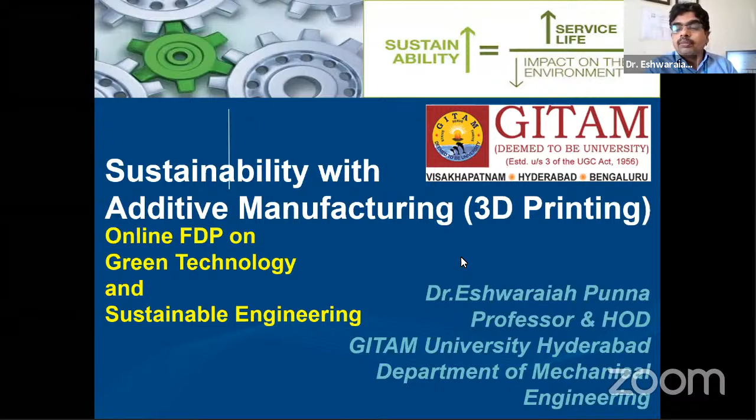So today I am planning to give some highlights on sustainability with additive manufacturing, 3D printing. So this is my plan of presentation. I'll be highlighting differences between subtractive and additive manufacturing, and what is additive manufacturing. I'll discuss a little bit about tools and technologies, processes or methods used in additive manufacturing, materials used in additive manufacturing, applications of additive manufacturing, 3D printing facts and forecasts, and last but not the least, I'm going to touch upon what you mean by sustainability with additive manufacturing.

So before going full-fledged, what is subtractive manufacturing? Whatever conventional manufacturing we do in our conventional machine shops or factories, where from a block of material we remove the material, right? For example, you want to manufacture a sphere. How do you manufacture a sphere? You will take a block of raw material and start removing the material in a curved fashion until you get a sphere shape, right? That is really an old method of doing it.

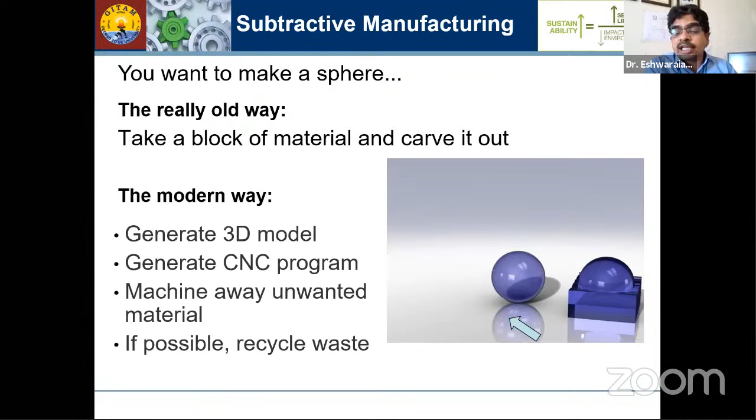But in recent times, not exactly 4 decades, it's about 2 decades, the method is generating a 3D model of the sphere and then generating a CNC code, computer numerical control code, and then machining away unwanted material. If possible, you will recycle the waste. So that is the way we are currently doing subtractive manufacturing, creating a component. As of now it may be a sphere, but any kind of feature to manufacture. Essentially, we are taking a raw material block and removing the material. So that's why the word subtractive.

Now I am going to take you to what is additive manufacturing. In contrast, additive manufacturing is the process of joining materials to make objects from 3D model data, usually layer upon layer, as opposed to subtractive manufacturing methods. In a subtractive manufacturing method, we are removing the material from the initial block. Whereas in additive manufacturing, as the term indicates, we go on adding the material layer upon layer, or layer by layer. So that is the difference.

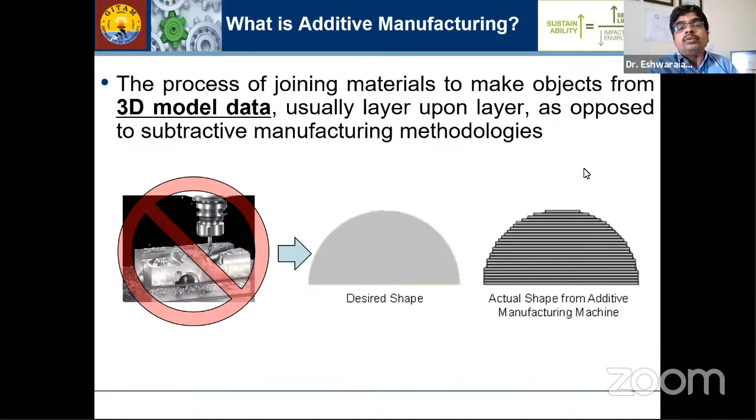If you look at it more closely, what is happening here in additive manufacturing? The creation of solid models usually happens with CAD tools or CAD software. Once you have a CAD model, there is other software available for slicing. We call it slicing software. There, this 3D model will be sliced into small thin slices. Then we will input that slice data to the 3D printer, and that builds layer by layer as shown in the picture. As each layer gets built up, you will get a component.

Many of you may be aware of this technology very well, but here I would just like to touch upon some differences between subtractive and additive manufacturing. This picture indicates that in subtractive manufacturing, in the first line, a raw material block will be taken into the machine, and then you will cut the material. In the process, you will get a 3D object, a physical component, plus some wastage of material. Whatever you cut, whatever you subtract, that material is wastage. Sometimes you will reuse it, but in order to reuse it, you have to process it again.

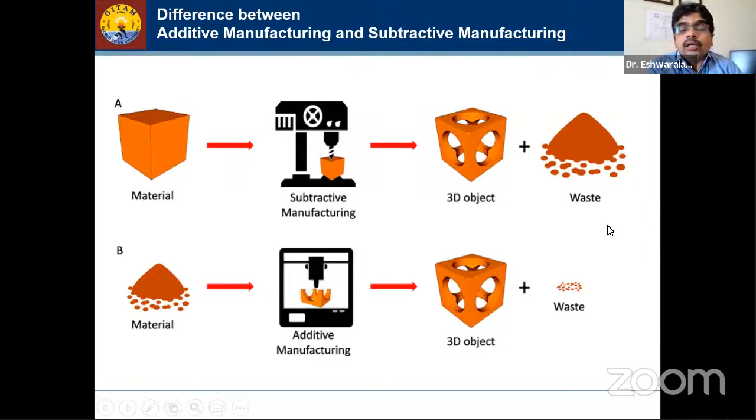Another important thing: in additive manufacturing, we are not using any tools to cut, whereas in subtractive manufacturing, we are using multiple tools to achieve the features. So we need to understand that. I got an interesting video I would like to play.

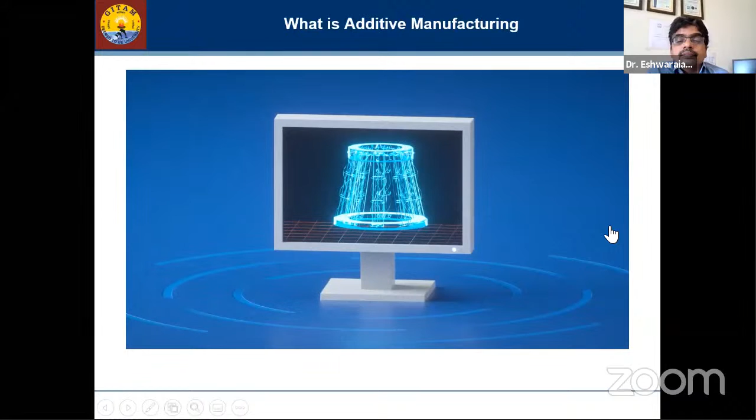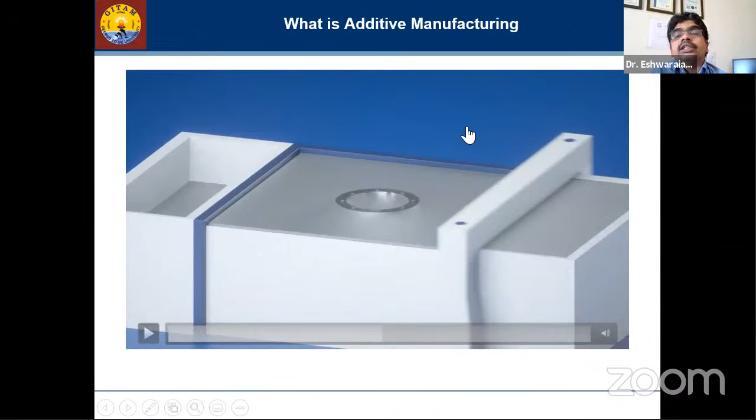Are you able to hear the video? Hello, sir. There is no audio in this video. Only video, no audio, is it? Yes, sir. Is there any way I can add audio? Yes, sir. When you're sharing the screen, there is an option at the bottom, share with computer audio. If you opt for it, the sound will come. One minute. Sorry, I don't know why my screen is not coming. I had to stop sharing. Share with computer sound, I had to click that. Now it is audible. Good. Thank you, sir.

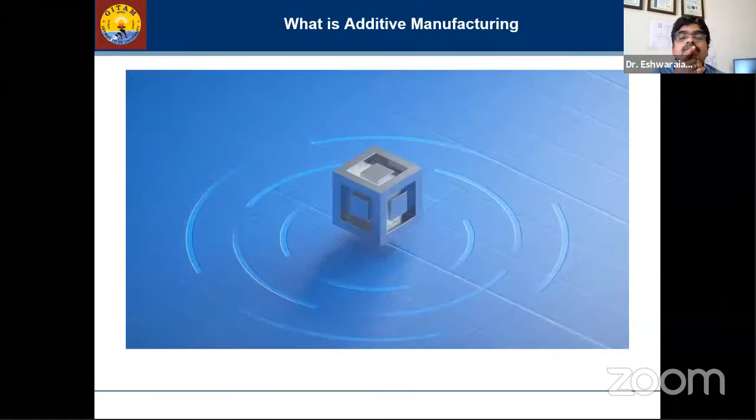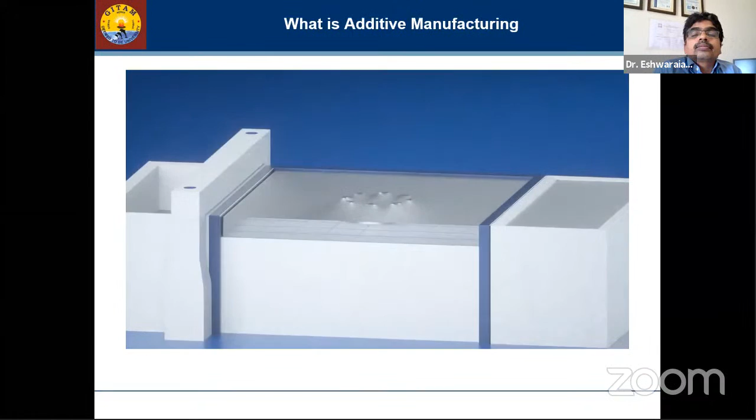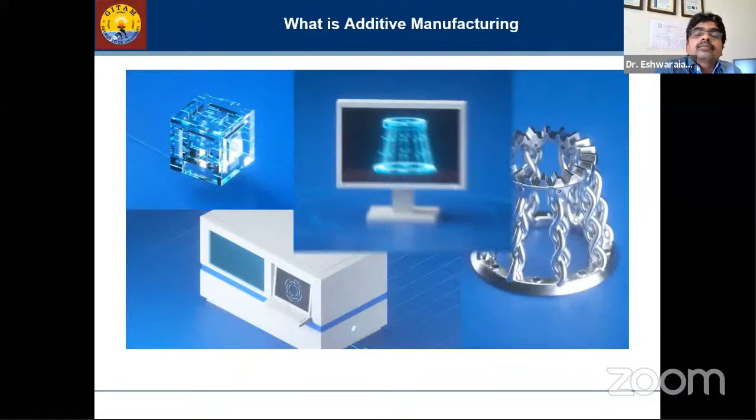So, what is additive manufacturing? Additive manufacturing, also known as 3D printing, is a process that creates a physical object from a digital design. An engineer designs the object using computer-aided design, or CAD software. The 3D design file is then sliced into thin layers and uploaded to an additive manufacturing machine. The manufacturing process begins once an extremely thin layer of metal powder is spread across the platform. A heat source, such as a laser or electron beam, then melts the first layer of the 3D design. The platform is lowered, and another layer of metal powder is spread across the platform. The layering and melting process is repeated until the part is complete. The metallic powder is removed, and a physical object is revealed. Additive manufacturing allows you to produce parts that are lighter, stronger, and more durable than traditionally made parts. Build times are faster. Engineers can add precise features and complex geometries without increasing cost. In fact, additive manufacturing is revolutionizing the way we work.

Okay, so that's about the introduction of additive manufacturing. But in general, there is a confusion between what is 3D printing and additive manufacturing. Actually, 3D printing is additive manufacturing. So, in one more video, I just would like to show you.

3D printing technology is already changing the way we produce objects, from tools and toys to clothing and even body parts. 3D printing is part of a process known as additive manufacturing, where an object is created by adding material layer by layer. Additive manufacturing allows designers to create complex parts for machines, airplanes, and cars at a fraction of the cost and time of standard means like forging, molding, and sculpting. Now, smaller, consumer-friendly 3D printers are bringing additive manufacturing to homes and businesses.

The first step in 3D printing is to create a blueprint of the object you want to print. You can use modeling software like Blender to create your own designs, or you can visit websites like Thingiverse or Shapeways to find objects other users have 3D modeled. Once you have a finished design, it's time to send it to the printer. Some printers, like the MakerBot Replicator 2, have renewable bioplastic spooled in the back of the device, almost like a string. When the printer receives the data, it pulls the material through a tube, melts it, and deposits it to the plate where it instantly cools. As you can see, the 3D object is created through layering, where the printer will add one layer of the object at a time until you have a fully formed structure.

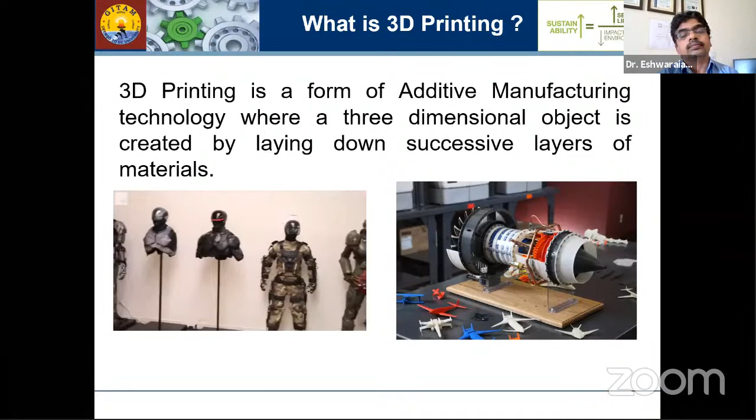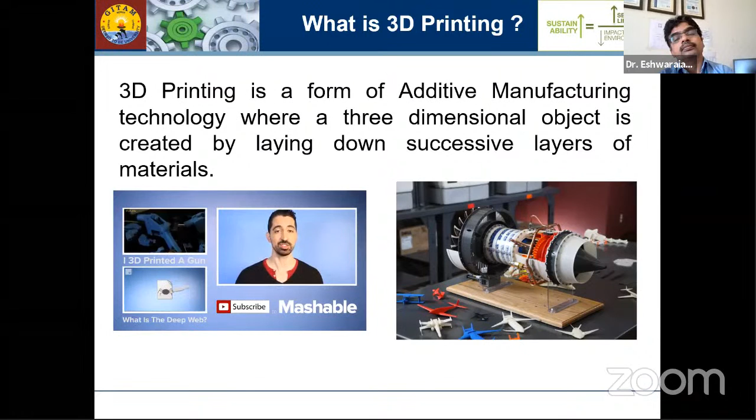The most common material used in 3D printing is plastic, but the use of some other materials allow for the creation of some pretty amazing products beyond simple tools and toys. 3D printing food is becoming very popular, and additive manufacturing has allowed for the creation of some pretty intricate treats. In the medical world, doctors are testing biomaterials for regenerative medicine. By using a patient's cells, doctors could 3D print small body parts like ears and noses. Some surgeons have even tested 3D printed organs for transplants. Recently, giant 3D printers in China printed 10 houses in just one day and at a cost of less than $5,000 per house, proving just how cost and time-efficient 3D printing can be. For more on 3D printing, check out Mashable's latest coverage. And don't forget to watch the 3D printing tech.

Okay, so through these two videos, I would just like to introduce what is additive manufacturing and 3D printing. So essentially, both are the same. So the key thing here is to design your component. So that is up to your imagination. So as a faculty, what we need to understand here is, in order to effectively use this technology, we need to encourage our students to do better modeling.

As of now, what is happening in our institutes, majority of times, according to the syllabus, some portion of engineering graphics we are teaching for mechanical students, the manual drawing, some basic elements, entities like line, curve, planes, etc. And later we are taking them to AutoCAD, how to create these basic entities. In the subsequent years, in the second and third years, we are introducing some kind of modeling of the components, and subsequently some machine design. And then we are asking them to do some kind of projects using these components. So that much only we are able to give.

Okay, so the three major processes are molten polymer deposition, or we call it fused deposition modeling, where the material is in the form of a kind of wire that will be melted, and based on the slicing profile, the material will be poured onto the bed. After completion of one layer, the bed will go down equivalent to one layer thickness, and then the next layer will be formed, poured, and then subsequently, layer by layer, the component will be built.

Whereas the second methodology is SLS, selective laser sintering, where granules of material will be poured, and using a laser, heat will be supplied. Based on the layer profile, the heat is applied onto the powder, and it solidifies and forms a shape.

And photopolymerization is another method, SLA, stereolithography. So here the light source will be applied onto the material to form the shape. So let's look at these three technologies. And apart from this, there are some more methods we will be looking at. In one video, these three technologies are explained very well. Let's look at it.

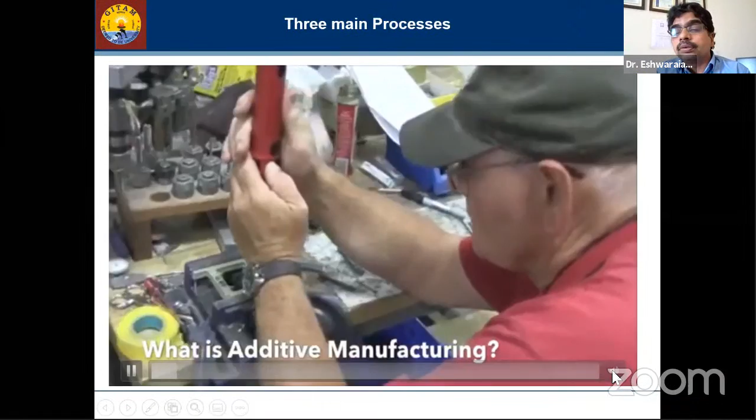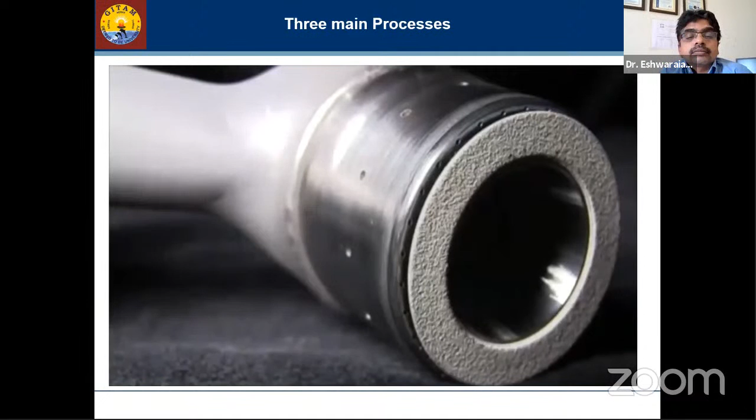Additive manufacturing, otherwise known as 3D printing, could one day be responsible for the third industrial revolution of sorts. The hype of 3D printing started small, but has continued to transform for the last 25 years and has begun rapidly advancing. Just to be clear, additive manufacturing is the manufacturing of tangible 3D items with the use of a printer. This is made possible through the use of computer software and a printer head or a laser to assemble objects from the bottom up in fine layers.

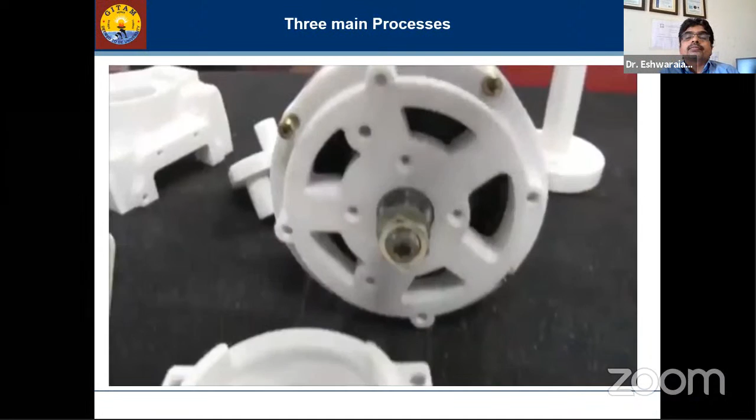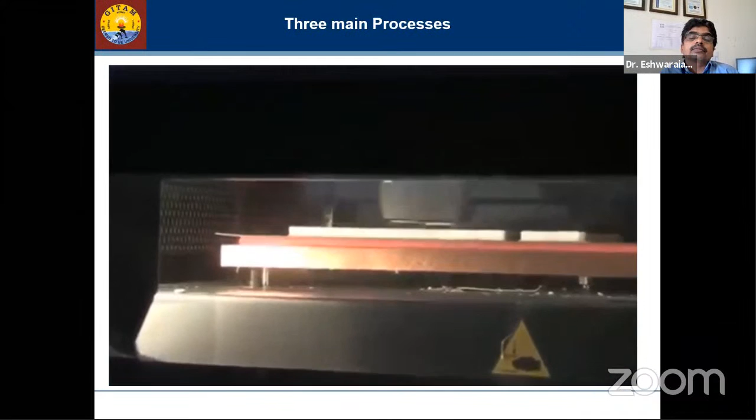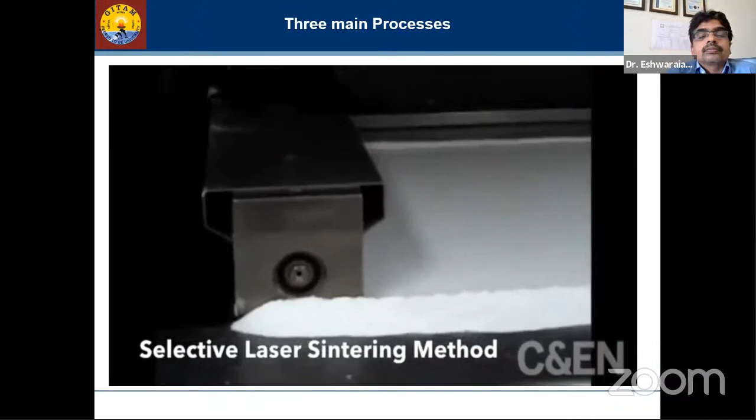Although the technology has been in the works for 25 years, it has been a slow process of development. However, there are now a few 3D printers available on the market at a very reasonable price. There are three types of additive manufacturing methods, which include selective laser sintering, fused deposition modeling, and stereolithography. Created at the University of Texas, selective laser sintering is a process using white nylon powder called polymer to create 3D objects. The polymer is laid on a 3D machine and then rolled down to create a fine layer.

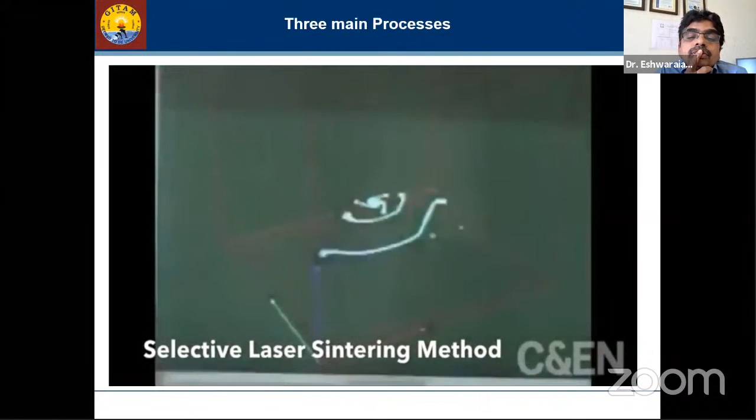The engineer then uses CAD to create an object which is only limited to the imagination and then processes this through the machine. The SLS method uses a laser to scan the surface of the powder. It fuses the polymer together to create a .007-inch layer. This process is repeated over 1,000 times to create an object. Once this is complete, the machine ejects the object for the engineer to brush off the excess powder using cleaning tools similar to those used in dentistry for the final process.

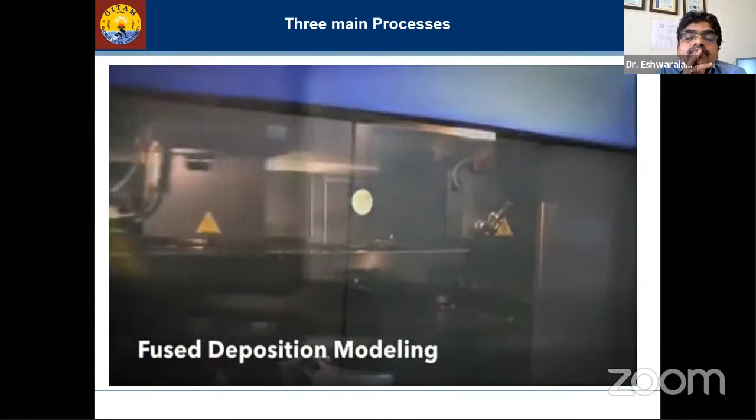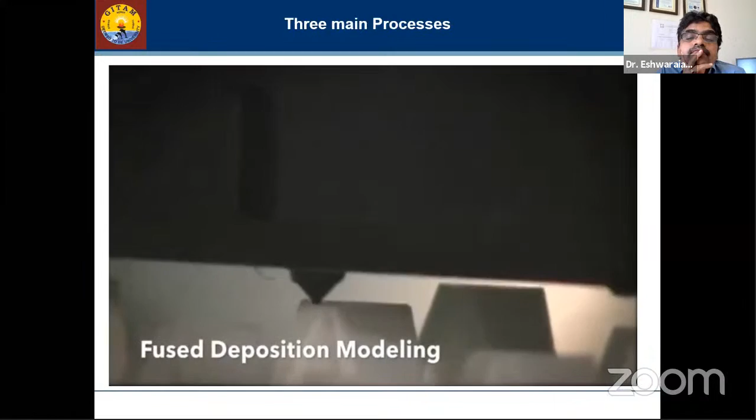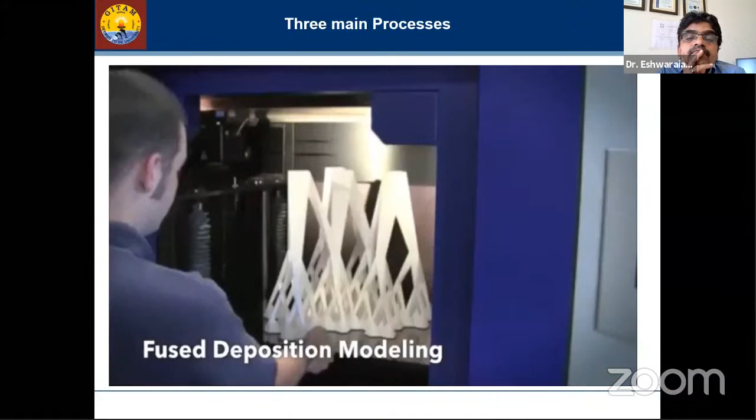Fused deposition modeling is the process of additive manufacturing where the 3D printer sprays a thin layer at a time over and over to eventually create an item. The process requires little human involvement. The engineer uses patented software called Stratasys fused deposition modeling technology to design the object and then either ABS, polycarbonate, or polyphenylsulfone to create strong, durable parts. Once the engineer has made the model on the software, the machine takes over and sprays the design. Once the process is complete, the part is then submerged into a water-based solution where any supporting structures are dissolved. The final product then has a smooth finish with fine details.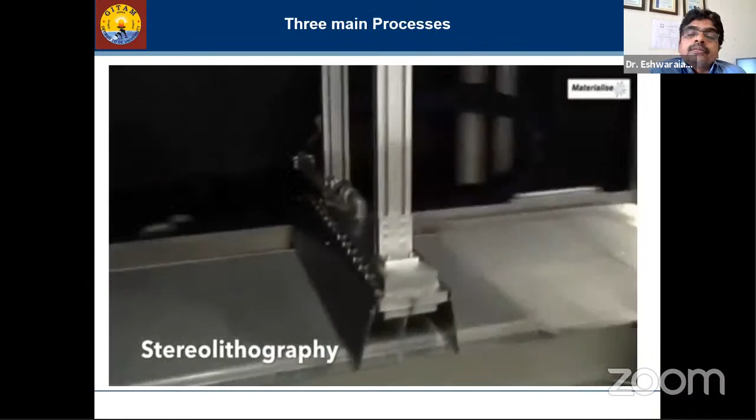Stereolithography is the combination of photochemistry, laser, and software technology used together to create an object from a gel. The CAD data is designed and then sliced into very thin cross-sections. A beam of ultraviolet light is focused on the surface of a liquid photopolymer tracing the design. The product turns the liquid layer into a solid plastic. Once a single layer is completed, it then lowers the SLA machine slowly until the object is complete. This continues until the product is completed, where it goes into an ultraviolet oven to cure the part. This requires little supervision while working around the clock.

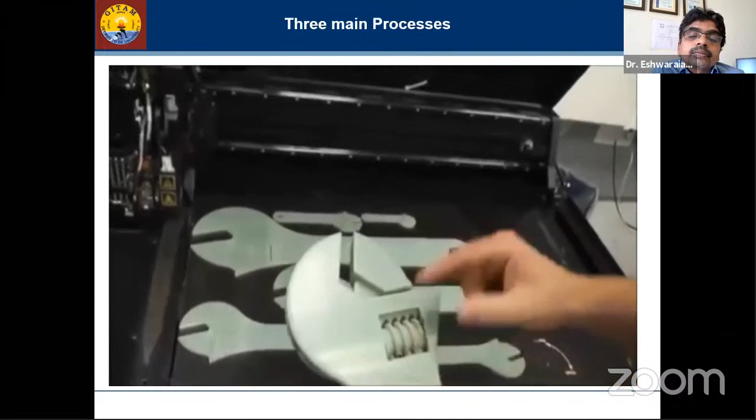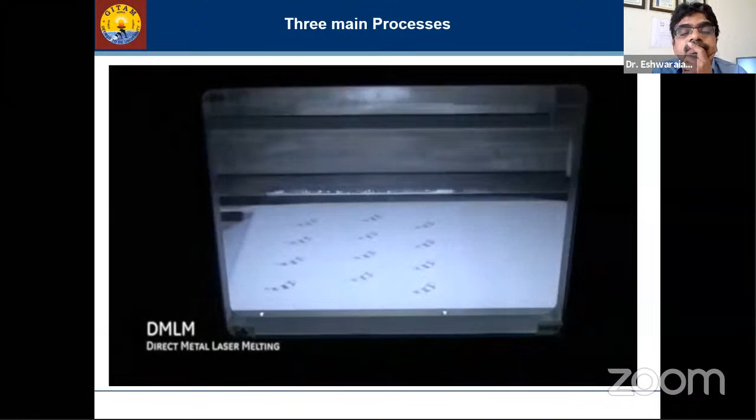Additive manufacturing has cast a new light on the way items are made in today's world. With our technology, there is no limit to what we can create with the use of computer-aided designs and 3D printers. It is inevitable for everyone to own a personal 3D printer in the comfort of their own home in the near future. The three processes of printing, selective laser sintering, fused deposition modeling, and stereolithography, are in the infancy stage and cannot be totally relied on just yet. The more that our technology advances, we become more capable of producing new and innovative products to help make the world a better place. As Eleanor Roosevelt once said, "The future is literally in our hands to mold as we like, but we cannot wait until tomorrow. Tomorrow is now."

Okay, so those are the three methods for additive manufacturing. And apart from that, material jetting is another method. It is an additive manufacturing process in which droplets of build material are selectively deposited, sometimes through a single nozzle or multiple nozzles. So with multiple nozzles, you can also get a multiple-color component.

So the nozzle will move in all three directions, and ultraviolet light will be applied as the curing source. So again, here also the material will be exposed layer by layer.

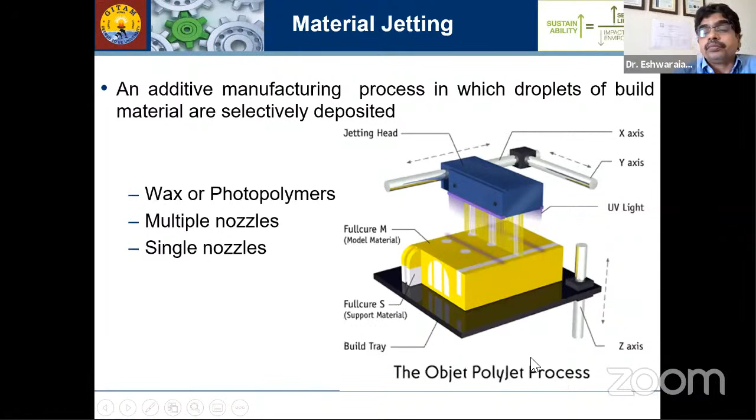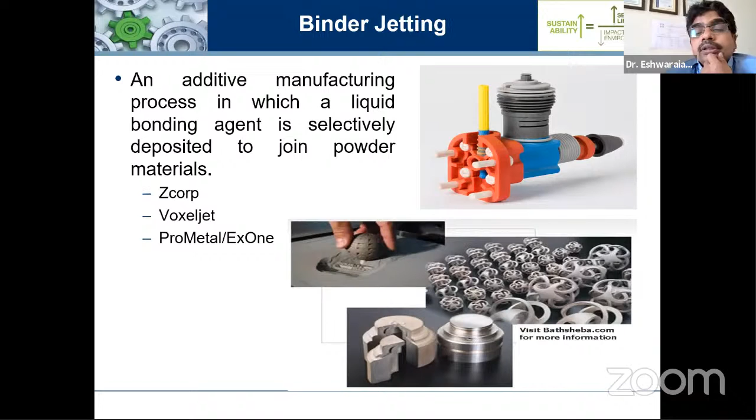So another method in additive manufacturing is binder jetting, a process in which a liquid bonding agent is selectively deposited to join powder materials. Okay, so some minute parts, like hearing aids, such kind of small components, using powder materials with a binding material, we can create the parts.

And material extrusion is another method. It is also used in FDM technologies, an additive manufacturing process in which material is selectively dispensed through a nozzle or orifice. For example, Stratasys FDM machines use this extrusion method. The wire will be fed, and that wire will be exposed to the heat source, and the wire will get liquefied and it will pour onto the profile.

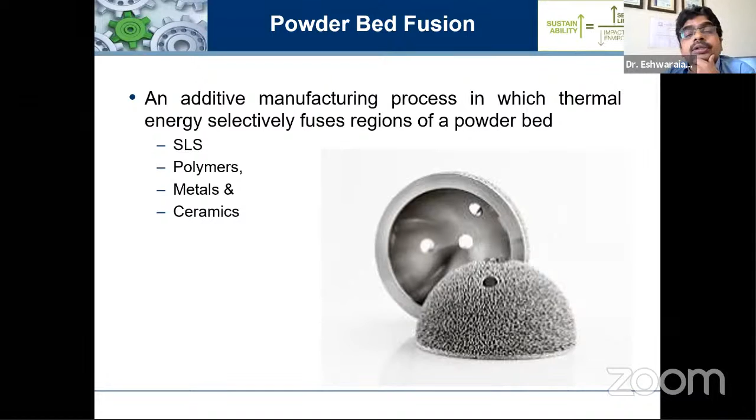So the powder bed fusion method selectively fuses regions of the powder. This method is used in SLS, selective laser sintering, with polymers, metals and ceramics. You can use these materials in SLS. Okay. And another method, we just now have seen stereolithography and selective laser sintering, where the heat source is laser. The polymers get exposed to laser to form the required profile, selectively cured by light activated polymerization. So stereolithography is one technique used in photopolymerization.

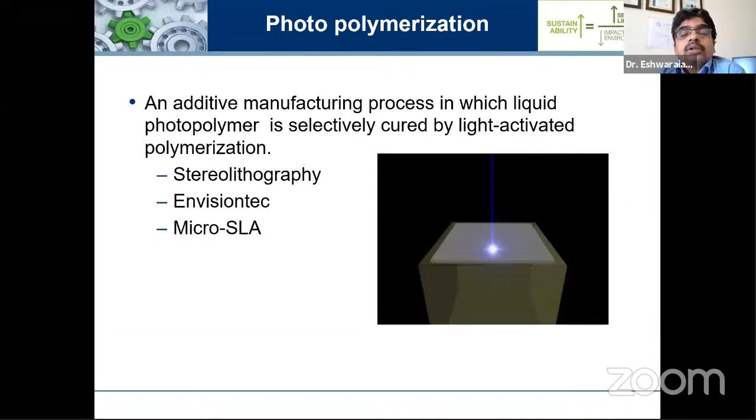Okay, so looking at all these methods, essentially what is happening here is you need to model a component and convert that component into a slicing model that gives the STL stereolithographic file. Basically it internally converts into triangulated objects, and once it is converted into slices, it will be like G code, the G codes of a CNC machine. After converting the 3D model into slices, each slice is like geometrical locations. The machine has to understand the profile using geometrical locations, and those will be converted into G codes.

And in turn in 3D printing, the x-axis, y-axis, z-axis movement happens as it happens in the CNC machine, and there is a synchronization built between the movement of the 3 axes and pouring the material through the nozzle, or through the sintering process, or through the light source process. So essentially it will be a G code again.

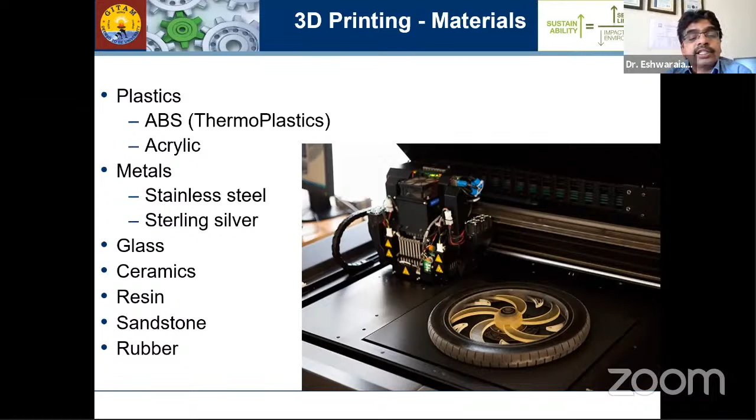So some of the materials used in 3D printing are ABS, thermoplastics, acrylic materials, metals like stainless steel, silver, glass materials, ceramics, resins, sandstone, rubber, all these types of materials you can print. So if you look at technology versus what materials you can print, the extrusion process, FDM, fused deposition modeling, also called fused filament fabrication, uses thermoplastics, eutectic metals, edible materials, rubbers, modeling clay, metal clay.

Whereas light polymerized technologies like stereolithography essentially use photopolymers. And powder based technologies are like EBM, SLM, selective laser melting, selective laser sintering, and direct metal laser sintering. All these technologies use multiple materials, like SLA, photopolymers again.

EBM, almost any metal alloy, including titanium alloys, you can use there. And SLM, titanium alloys, cobalt chromium, stainless steel, aluminum, any material you can print. And selective heat sintering is another method where thermoplastic powders will be used. Selective laser sintering, as I mentioned earlier, thermoplastics, metal powders, ceramic powders can be used.

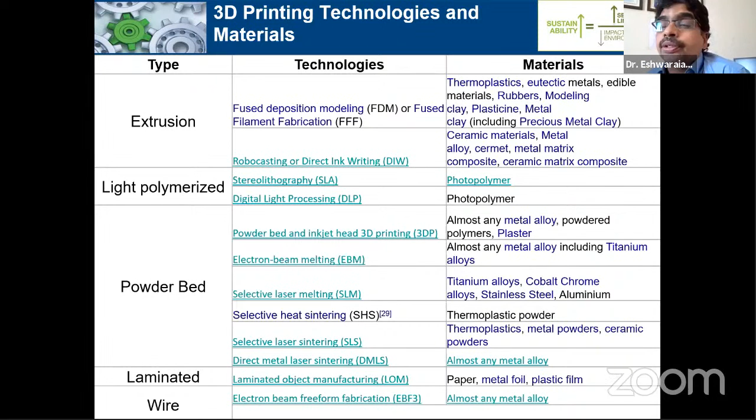Wire technology, electron beam freeform fabrication, is another technology. Almost any metal alloy you can use. So this will give some brief idea what kind of range of materials you can use in these technologies. Okay. So let's look at various applications. I know many of you are already aware of the applications, but however, I would like to highlight some of the applications.

So this technology has applications in medical, dental, extensively they are using, the architectural domain, engineering, you name any field like automobile, aerospace engineering, any engineering field, you have applications of this technology. Chemistry, and you have applications in archaeology, sculptures, art, all these domains you have various applications. Let's look at how they are using this technology in these areas.

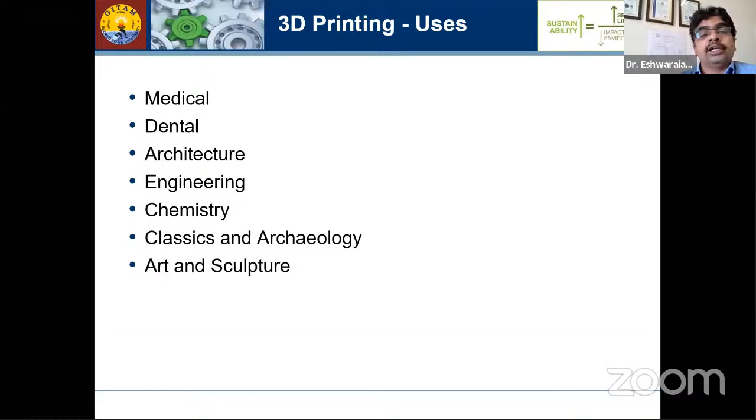So more complex geometries can be achieved through this, because if you go for conventional manufacturing, if you want to get the internal features or structures, then you might need to go for multiple axis CNC machines, or if a component is not able to get a required curve, then instead of a 2-axis machine, 2.5 axis, you have to go sometimes 3 axis, sometimes for more turbine related or more complex structures, you might need to go to 4 axis or 5 axis or

6 axis. So with the number of axes involved in the machining, the cost of that machine will increase exponentially. So very rarely we use 6-axis machines for the components, unless in an aerospace domain or defense related projects. In normal consumer shops, we will not go for 6-axis or 5-axis machines, since those are very expensive. So this technology is helping us. No need of those number of axes to produce the component.

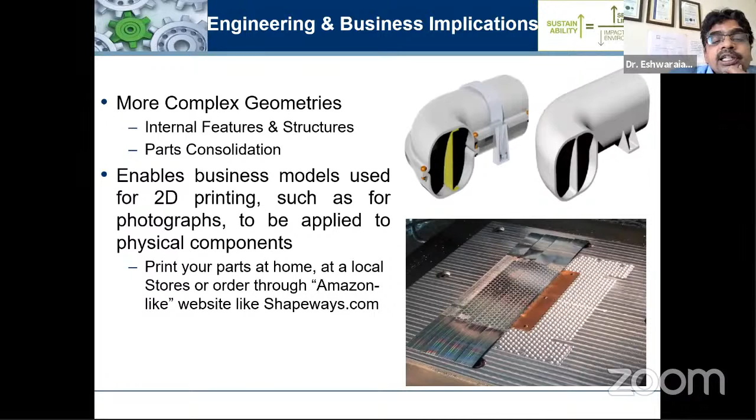Any amount of complexity of geometry, any amount of internal features can be achieved, and it enables business models used for 2D printing, such as for photographs, to be applied to physical components. Print your parts at home, at a local store, or order through an Amazon-like website like shapeways.com. So the business scenario is changing.

Okay, so essentially you can order some of the components, or you can get some components from sites like shapeways.com, or some other sites where you can get pre-modeled components, and then you can use those components and print them. So user changeable web content plus a network of additive manufacturing producers is already enabling new entrepreneurial opportunities.

So all these companies like shapeways.com, Freedom of Creation, FigurePrints, these are some of the companies evolved after these concepts. So they essentially get the components from the net, and they will print it and sell it over the net. Okay, so these technologies are giving an opportunity to new entrepreneurs.

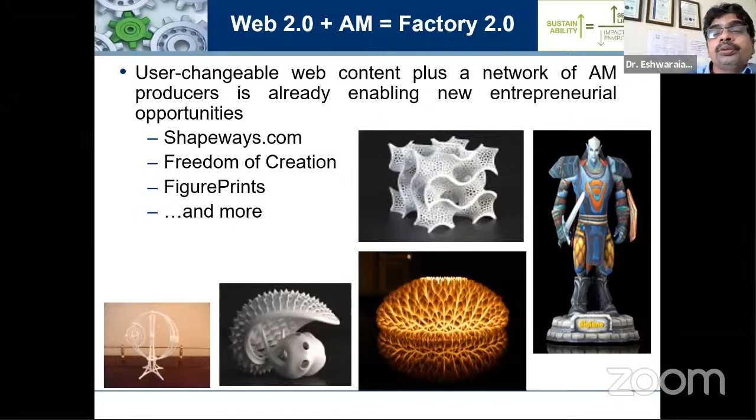Okay. So, impact on logistics. This technology has a lot of impact on logistics because design anywhere, manufacture anywhere is now possible. Earlier in the conventional manufacturing method, you have to procure the raw material and then you will be manufacturing and then keeping it as work in progress or some inventory before giving to the customer. Maintaining the inventory itself is a very big task and a lot of investment is involved.

And if it is expensive components, keeping multiple components for a long time is economically very difficult for the organizations to maintain. So all those things have been addressed by this technology. Here you can design whatever you want and print anywhere. You can design anywhere and simply transfer the design, and somebody will print it and deliver to you. Or you can design at your own place and print at your place. Manufacture at the point of need rather than at the lowest labor location.

Okay, so that is the change in the logistics. That means you don't need to transport the raw material from one place to other. So that will reduce the transportation in a huge way, changing just-in-time delivery to manufacture on location just in time. So you can just order the things, and within no time you will be getting the component, or you yourself can print. So that way it has a lot of impact on the logistics. Now it is matured in some of the Western countries, but in India it is picking up at a very high pace.

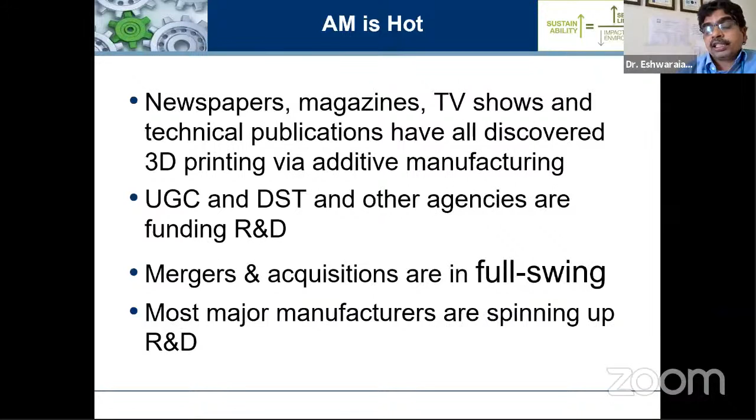The funding agencies like UGC and DST are very much inclined towards giving a lot of funding for R&D related to additive manufacturing or 3D printing. Newspapers, magazines, TV shows, everybody is talking about 3D printing and additive manufacturing. A lot of business acquisitions and mergers are happening in this area. Most major manufacturers are spinning up R&D. So they are looking at how to make some percentage of their conventional components using 3D printing. Essentially, a lot of buzz around the market.

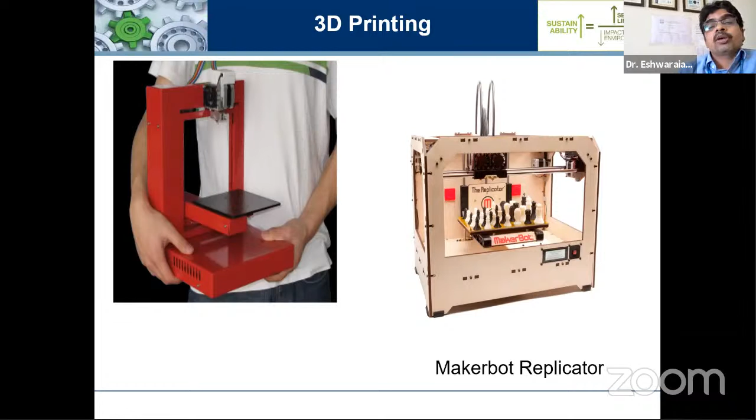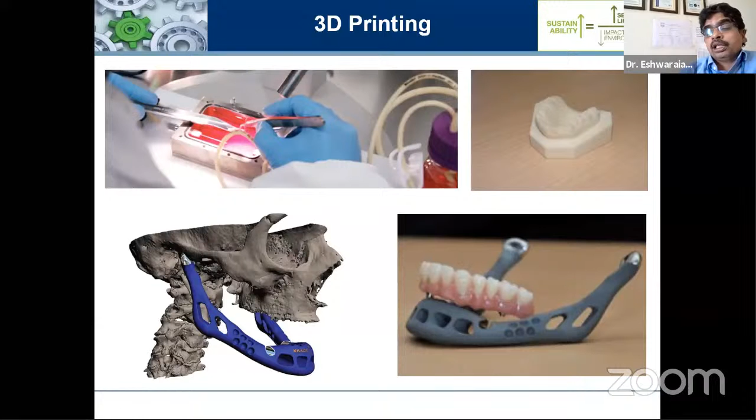Okay, let's just look at some of the players in this market. MakerBot is one of the promising ones. And as you know, Stratasys is one of the pioneers in this 3D printing area. They sell printers as well as printing materials. Okay, so you can build many types of toys, functional toys. And as I mentioned, there are a lot of applications in dental implants or human implants in the orthopedic area or dental area.

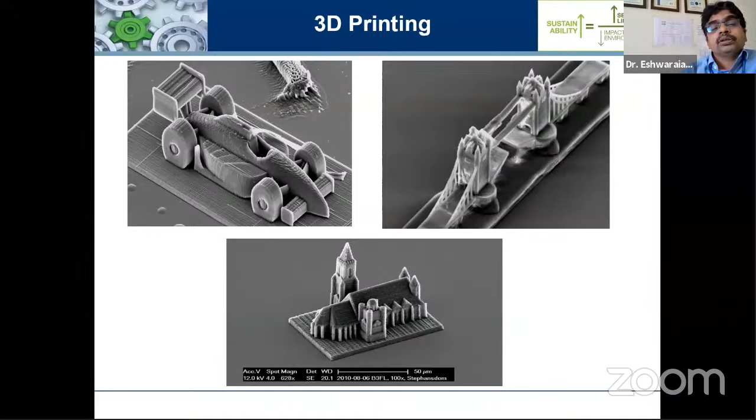And this is toys manufacturing, and in the architectural area also there is a lot of scope to apply. So if you look at some of these images, there are printers to print the sculptures which you see on the roads most of the time in the Western countries. Such kind of sculptures you can see. Those can be built within no time using these printers. Otherwise, getting those features with conventional manufacturing is very difficult.

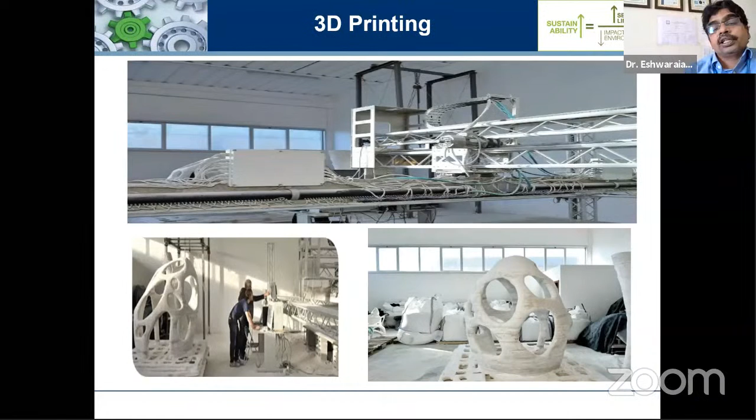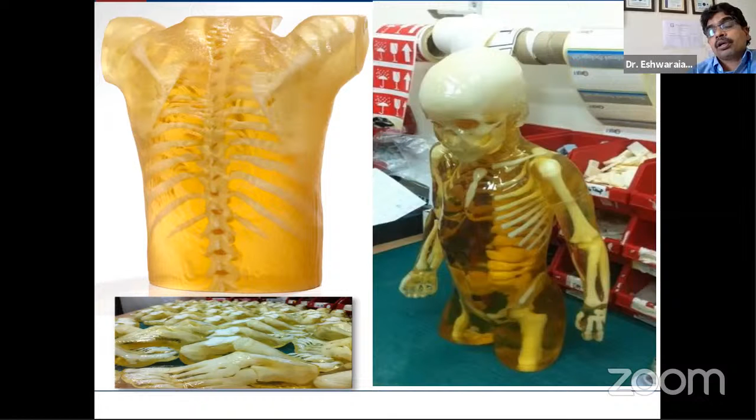Okay, so you can print your face, and some software like 3ds Max, Blender, Google SketchUp, some of these tools you can use to generate an STL file. See some of the medical applications, dental implants, and not only dental, orthopedic implants also you can print, and then the doctors are doing trial and error for research purposes. These implants are very much used in the medical field.

Okay, so if you look at this beak, to generate this beak through a conventional manufacturing process, definitely you need a 4 to 5 axis or 6 axis machine to accomplish these kinds of structures. But with additive manufacturing, with small support materials and a small setup, you can accomplish this. Whereas in conventional manufacturing, you need a lot of jigs and fixtures to hold these kinds of complex shapes. Of course, you have casting and other technologies, but to get a smooth surface finish, you need a lot of other processes.

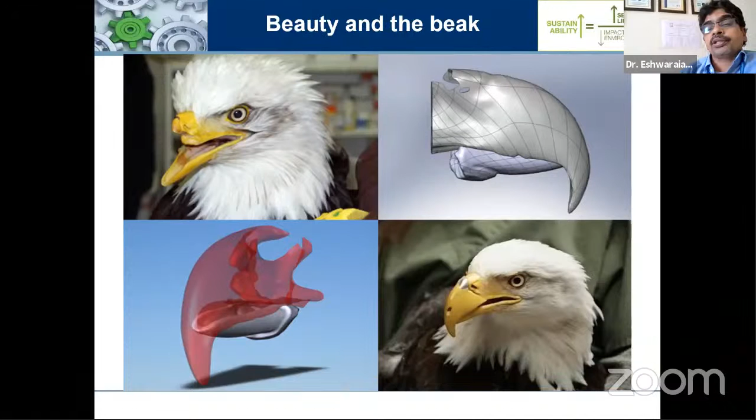Coming to general applications, there is a lot of interesting stuff you can do with additive manufacturing. See what is happening here. After the mother's scanning in the 5th or 6th month, you can get that scan image, and then you can convert that scanned image into a model using reverse engineering, and then subsequently you can slice it and print, and you can see your baby before birth. That is the kind of scope this has.

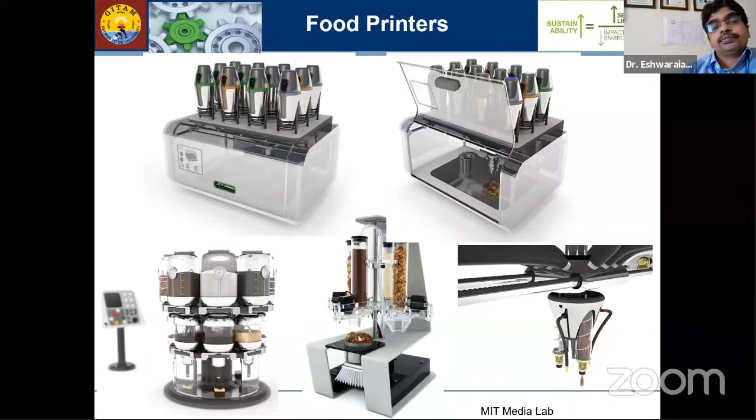Okay, and then one of the videos explains that 3D printing food is becoming normal. Chocolates, cookies, anything you can customize to your requirement or your taste, and you can print whenever you want. Not only food, you have home applications like toothpaste, toothbrush. You can customize your toothbrush according to your tooth profile, so you can change the hardness of your toothbrush, the bristles, the color, you can customize that, and you can print at your home.

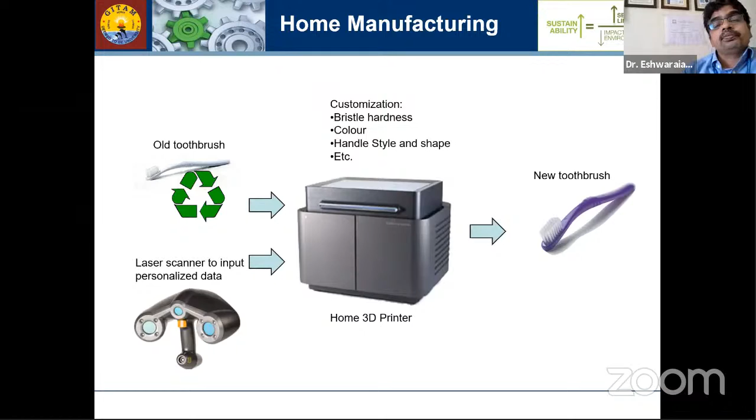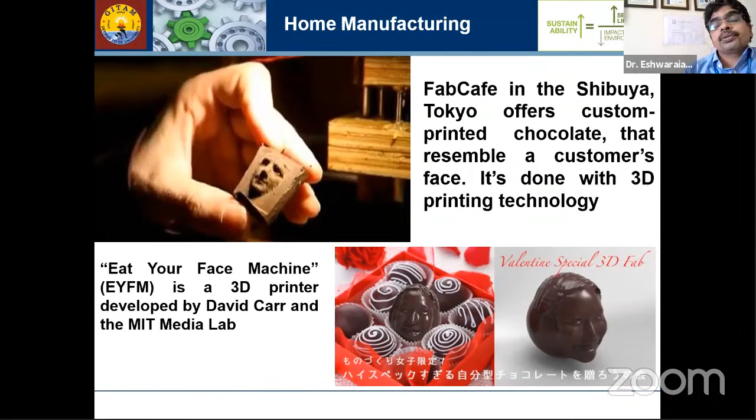Okay, so as I'm mentioning, at one of the cafes in Tokyo, they are printing your face during the Valentine special. So they are making a lot of business on it. Like that, in India also, similar things are going to happen very soon, and maybe every household might have a 3D printer in the near future, not very far away.

So let's look at what facts and forecasts this technology has. I will take 5 more minutes before touching upon sustainability. Some time back, I saw this information. By 2023, the 3D printing additive manufacturing market worldwide might be 7.7 billion euros. By 2013, it is projected 2.2. Now, by 2018, it is 4.5. But by 2023, it is going to increase up to 7.7 billion. So looking at this, there is a lot of scope in this area.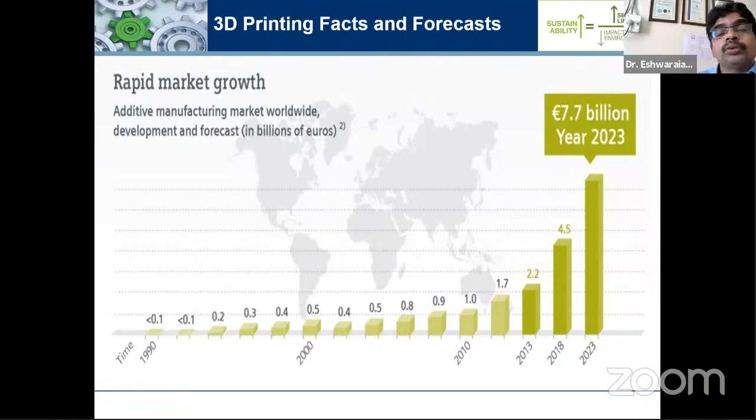Coming to the Indian market, the 3D printer market is expected to be an $80 million business by 2021. The majority of this is happening in automotive applications, the biggest chunk of business, and educational and medical applications are also expected to witness good growth in this area.

Other niche applications include art, crafts, interior decorations, fashion, accessories, footwear, jewelry design, animation and gaming, customized footwear designs, furniture and modeling. Every area has tremendous scope. Already we are seeing the majority of house furniture coming as a single piece, printed by 3D printers.

Major players active in the India 3D printing market, including manufacturers and distributors, are Altem Technologies and Brahma 3. Some of these companies are actively engaged in this area.

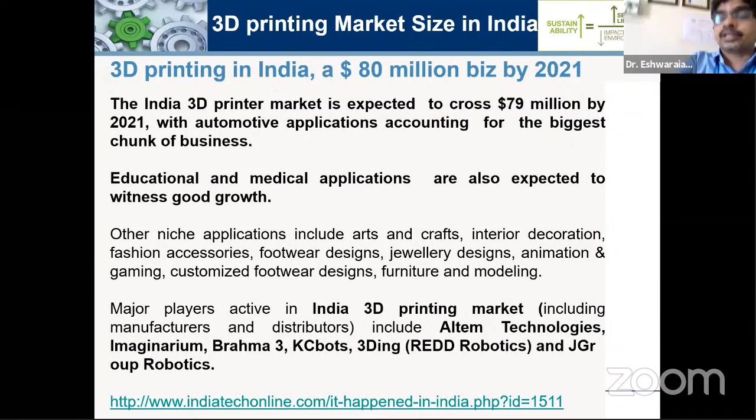So whoever wants to do research in additive technologies, one of the promising areas is looking at the current methods and their limitations. From the limitations, we can get clues to improve them with optimized parameters, like improving the speed of printing. That is one promising area one can look at, and funding agencies are very much willing to fund such projects.

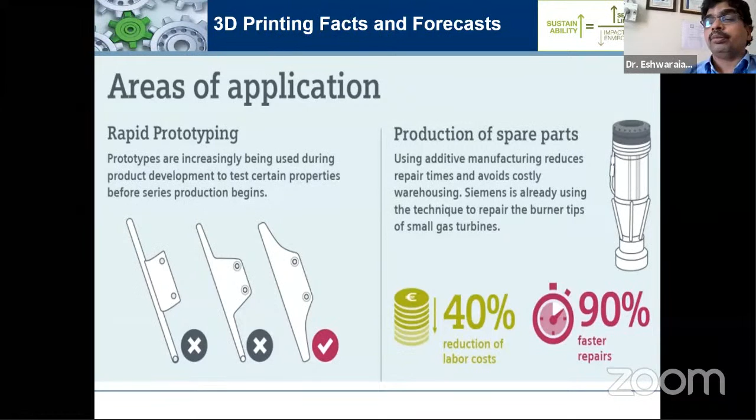For spare parts, using additive manufacturing reduces repair times and avoids costly warehousing. Siemens is already using the technique to repair the burner tips of small gas turbines. By using this technology, they are already reducing labor cost by 40% and performing repairs 90% faster. So you have scope in this technology.

You can customize your items while printing. You can also do small batches. It is very costly to create molds and production lines for small batches. Such items can be produced cost efficiently with additive manufacturing.

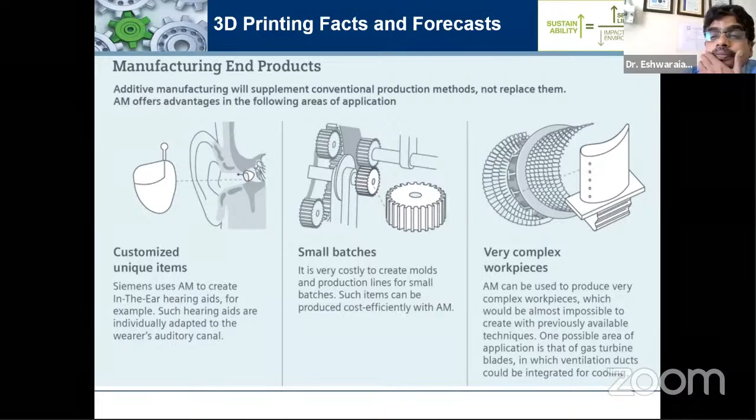Very complex pieces and geometries are easily created using additive manufacturing. It is used to produce very complex work pieces which would be almost impossible to create with previously available techniques. One possible area of application is gas turbine blades, in which ventilation ducts could be integrated for cooling. Some of these complex components can be accomplished.

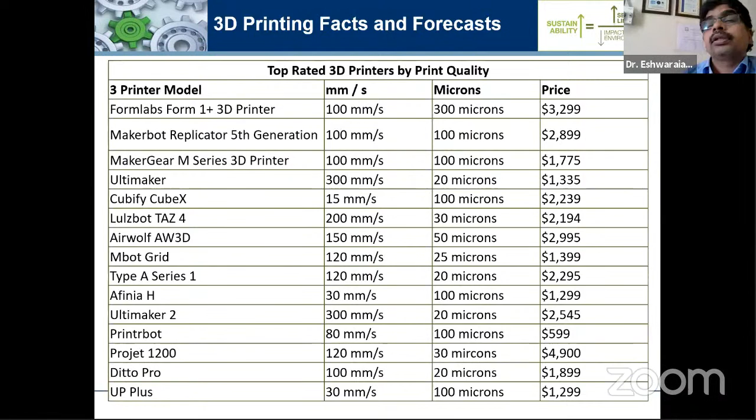Having said that, as we discussed, we can reduce the wastage of material, and there is an impact on logistics, right? So with this, sustainability as a definition is the integration of economy, society, and environment. Let's look at how we are impacting these three with this technology.

Let's look at material sustainability. Almost no wasted materials, which means it is economical, and whatever material we waste through conventional methods, we can save. No need for a massive product inventory. That is also economical, and it encourages good design, product optimization, and zero cutting tools. Zero cutting tools is another advantage to the environment as well as to the economy.

The cost of cutting tool is zero, and when you say cutting tool, after the cutting tool is worn out, you have to dispose of it, right? So the disposal will create a problem in the environment. That is also not there. And cutting emissions down, because we are reducing the transportation. As I mentioned to you, there is a logistic impact.

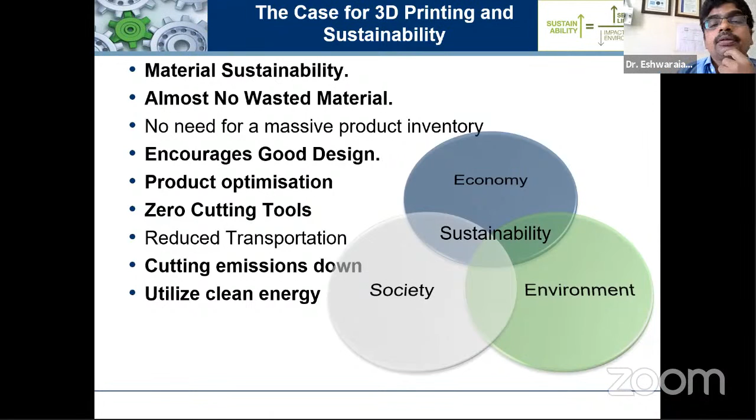So when you reduce the transportation and cut emissions, that indirectly impacts the environment and society. So that way, this technology is sustainable. So to conclude, given the huge opportunity that exists in the market and the rapid consolidation that is taking place, it is certain that 3D printing will be adopted a lot more across industries.

Added to this is the fact that startups and entrepreneurs in India are seeing immense potential and benefits in 3D printing technology. It is only a matter of time before a compact and low-cost 3D printer comes out of India that will become a must-buy during Deepavali or any festival for Indian households in the near future.

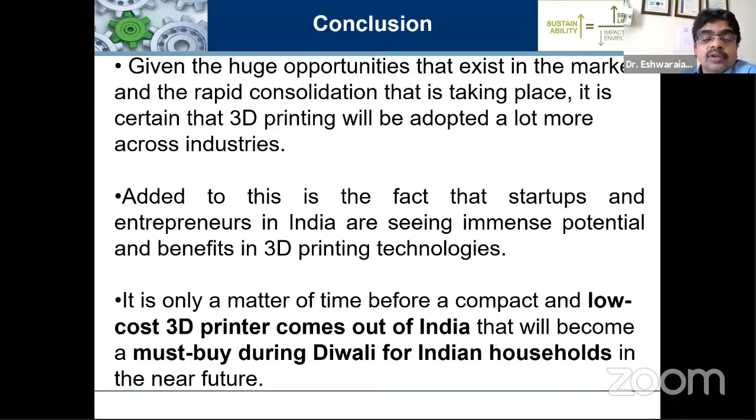Before that, I just want to play this and then we'll conclude.

Traditionally, when you think of printing, you think of printing out something on a piece of paper using ink. Well, 3D printing is actually printing out a physical object. You have a digital image that you can create using different animation modeling softwares. You connect this image with your 3D printer, and it analyzes it and prints it out in physical form, layer by layer. With 3D printing, you can have syringes filled with all different types of liquid consistencies: plastic, rubber, some more advanced ones are using metals. Manufacturers have been using 3D printing for decades to print car parts. The aerospace industry uses this. Doctors are printing out prosthetic limbs.

Excuse me, sir. No video, sir. Only audio is coming. Okay, I'll stop it here. You can play it once again, sir. You can check it, because only audio is coming, no video actually. Okay, 1 minute.

Yeah, are you able to see? Yes, sir. Oh, sorry, what happened?

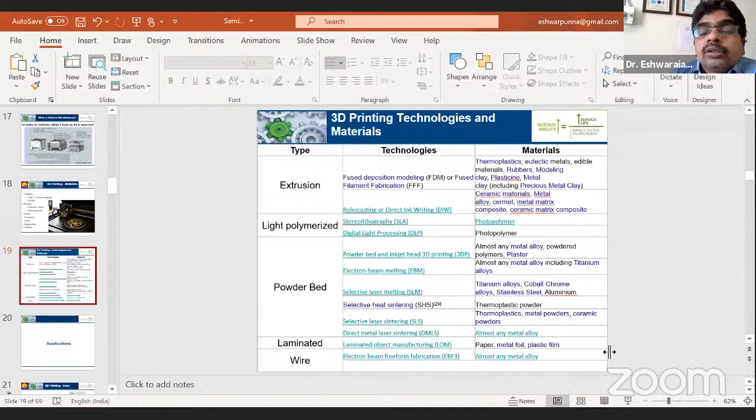Okay, so when you are trying to select a certain technology based on your material available or what kind of material you want to print, based on those materials you need to choose the appropriate technology. Okay, sir. Thank you, sir. Okay.